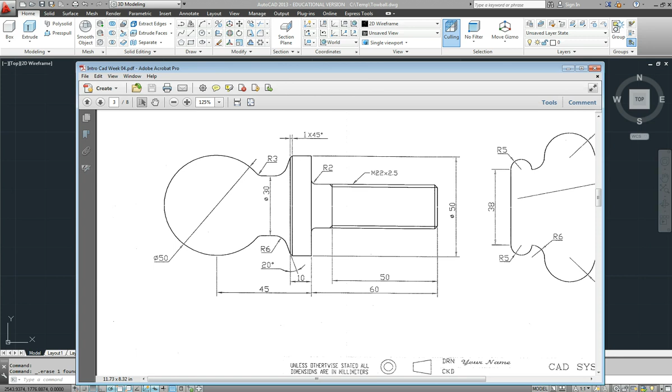So we're starting from this point down here, and we're going to draw a line. We can start at that point, and we don't know how long this line is going to be. We'll just use a fillet to finish it off, but we do know that it's at an angle of 20 degrees. So relative to my last point, I'll go a distance, guessing a distance, let's say 20 at an angle of, now that would be 90 degrees, plus 20 degrees would be 110, and that's the right angle.

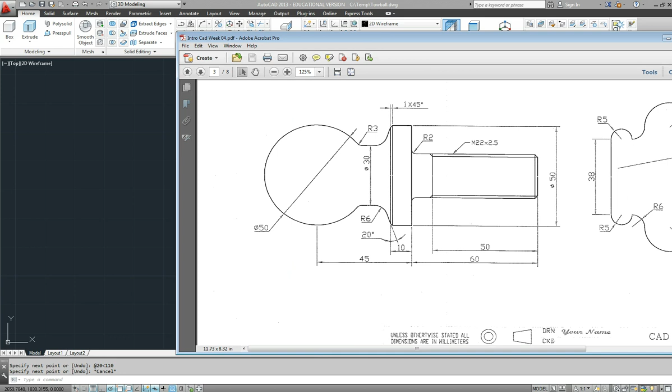Now the easiest way to get the center or the neck of the ball here would be to offset a line from the center line, and then we'll just drop a fillet in there. I might just do a center line through here to start with.

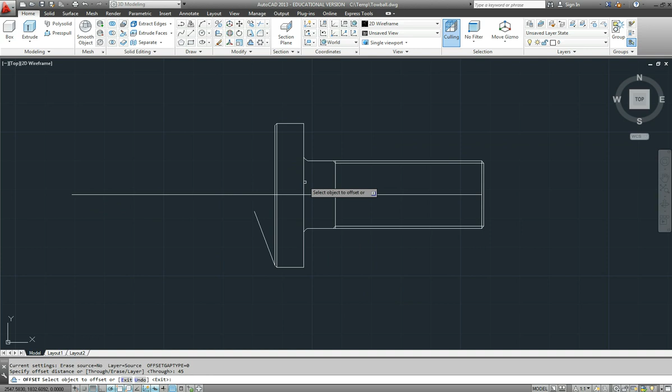Now just to get the center line of our ball, I'll offset this line here. It's a distance of 45. So there's the center of our ball. Let's just put in a couple of circles. It's 50 diameter, that'll be a 25 radius, and let's offset this line now.

Offset once again, and the distance is 30 between the two outer lines, so that'll be an offset of 15 from the center. So we'll go 15 down there, and now we just drop in some fillets. So fillet, set our radius. These days you can actually click on the word radius to set it, and the first one is a 6mm radius, so we'll just select those two lines, and there's our first fillet.

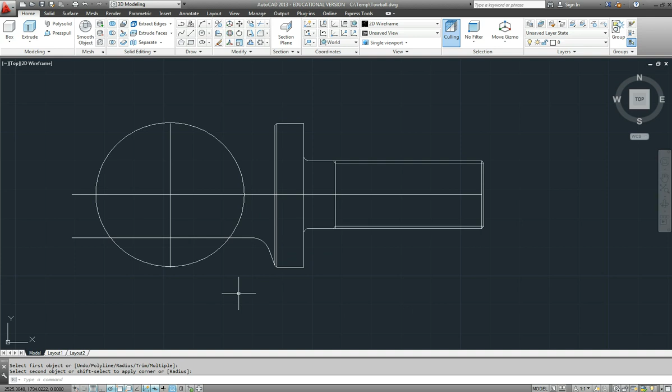And it says it's a 3mm radius coming to the ball, so fillet once again, radius 3, select the line and the arc, and that drops in the fillet there. Now we can put this up the other side by using the mirror command. Modify mirror, select the objects we want, 1, 2, 3, 4 entities, and our mirror line will be that center line. Don't delete the objects.

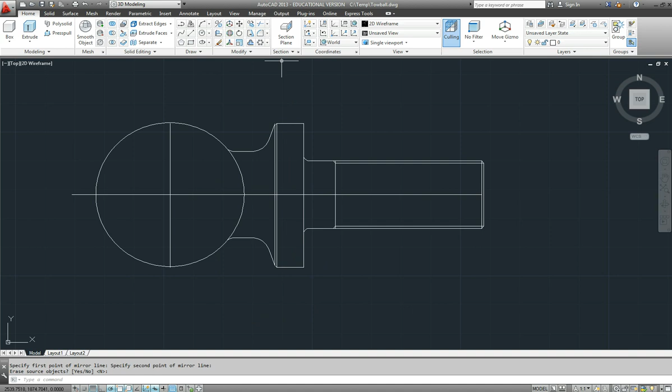So that's finished. Now we need to do some trimming. So here is trim. Let's use the coward's way of trimming. I'll just select everything, press the enter key, and click on what I want to delete. So that's trimmed back, and I think we might be nearly there. We can delete those center lines to finish it off. All good?